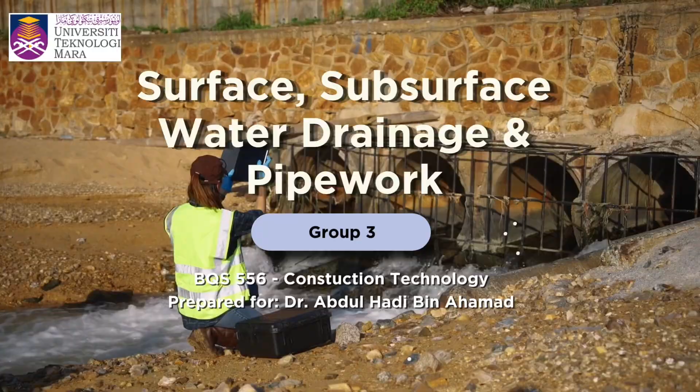Today, me and my group will present our case study related to surface, subsurface water drainage and pipework. These are our group members. We have Arfan Hakimi, Muhammad Shahid, Nur Akila and Siti Sarah.

Assalamualaikum, good day everyone. Today we are exploring a critical work of modern building drainage systems. Our presentation title is Surface, Subsurface Water Drainage and Pipeworks. It provides a comparative analysis of how we manage water at the surface and subsurface level, and the complex pipework system that ties it all together.

To illustrate this concept in the real world, we will be examining two projects of vastly different scale. First is the Mezzo, the Light City in Penang, and the Shanghai Tower in China. While the physics of water remain the same, we will see how the scale of building completely dictates the engineering response.

To understand why we need advanced drainage, first we have to look at the urban water challenge. The rapid urbanization has replaced our natural absorbent landscape with impermeable footprints like concrete and asphalt. This drastically alters how water flows, creating several threats such as urban flooding, water ponding and soil erosion. Perhaps most dangerously for a building, it creates hydrostatic pressure against foundations, which can lead to instability or leaks.

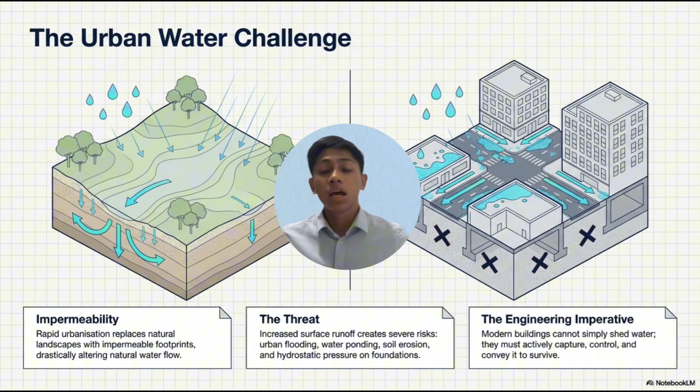In the modern era, the engineering imperative has shifted. Buildings can no longer simply shed water, they actively capture, control and convey it to ensure the structure's survival. A complete building drainage system is composed of three primary components. First is surface water drainage. This is our first line of defense. It captures rainwater from roofs, pavements and external areas using gutters and downpipes to prevent structural erosion.

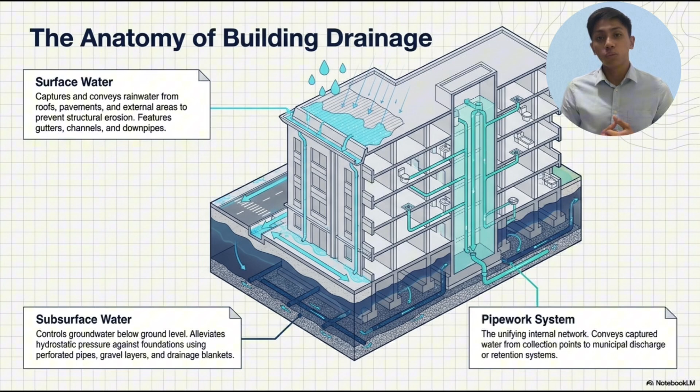Second is subsurface water drainage. This happens below ground and its job is to control groundwater and alleviate hydrostatic pressure against foundations using specialized tools like perforated pipes and drainage blankets. Third is the pipework system. Think of this as the building's circulatory system. It is the internal network constructed from materials like PVC, HDPE or cast iron that conveys captured water from various collection points to municipal discharge or retention systems.

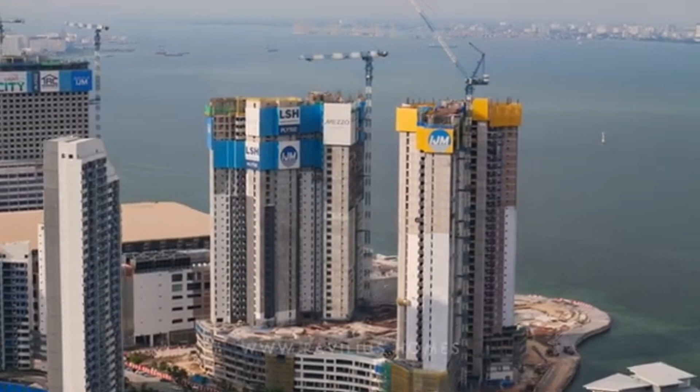To see this system in action, we are comparing two distinct engineering realities. On one side, we have Mezzo, the Light City in Penang, a 34-story residential development that prioritizes practical efficiency and gravity disposal. It represents the standard of high-density residential living on reclaimed land.

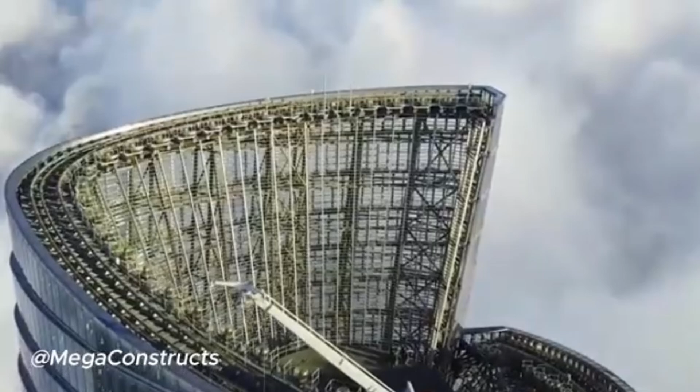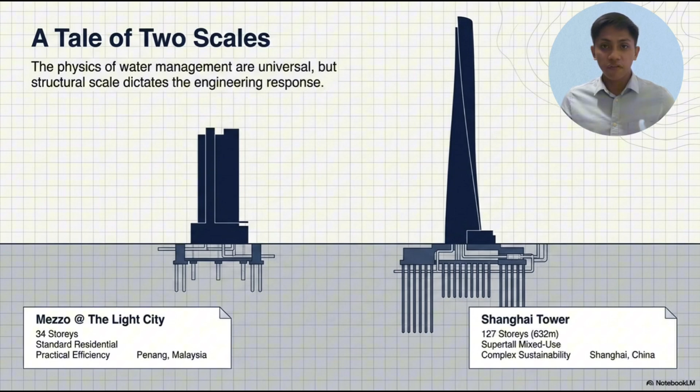On the other side of the spectrum is the Shanghai Tower, a 127-story super-tall skyscraper at 632 meters. The engineering challenges are exponentially greater. Here, water management isn't just disposal, it's a complex sustainability system featuring siphonic drainage and massive resource recovery systems that treat water as a vital asset rather than a hazard to be removed.

For our first case study, we selected Mezzo or the Light City, which is a 34-story residential development located at Jelutong Reclamation Land, Penang. The project consists of 456 apartment units built on top of a 6-story podium. One of the main reasons we chose this project is because of its location. Since it is constructed on reclaimed coastal land, the engineering conditions are quite different from normal development.

As shown in the image, the building is located very close to the waterfront. This means the site experiences a relatively high groundwater level, which increases the risk of groundwater fluctuations and differential settlement. Because of this site condition, the drainage and pipework system become much more than just a system to remove water. They are also essential for protecting the building foundations, maintaining soil stability, and preventing moisture from accumulating around the structure. Therefore, an efficient drainage system is a critical element in ensuring the long-term safety and durability of this development.

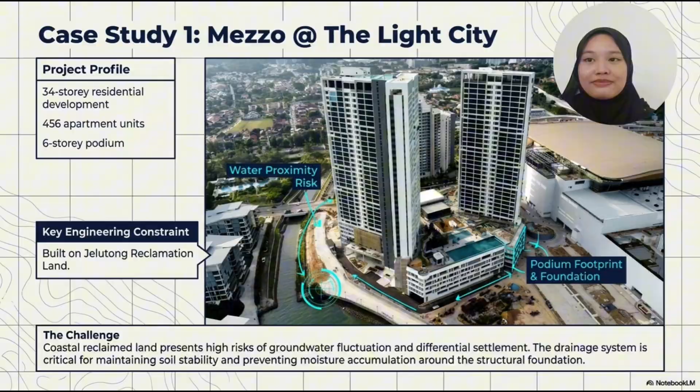Based on our case study, the project adopts a gravity-fed drainage system. Instead of depending heavily on pumps, the drainage network uses the natural slope of the pipes to carry stormwater and wastewater toward the discharge point. This makes the system more energy efficient and easier to maintain.

For the construction methods, the project uses the conventional open cut trench method. The construction process starts with trench excavation, followed by pipe bedding preparation, installation and jointing of the pipes before the trench is backfilled and compacted. This method is widely used because it is practical, economical and suitable for underground drainage installation.

Looking at the outcome, this drainage network is designed for rapid disposal rather than water storage. In a high-density residential development like Mezzo, the priority is to remove stormwater and wastewater as quickly and safely as possible. Overall, the gravity-fed system provides a reliable, low-maintenance and cost-effective solution that supports the operational needs of the large residential development while reducing long-term maintenance requirements.

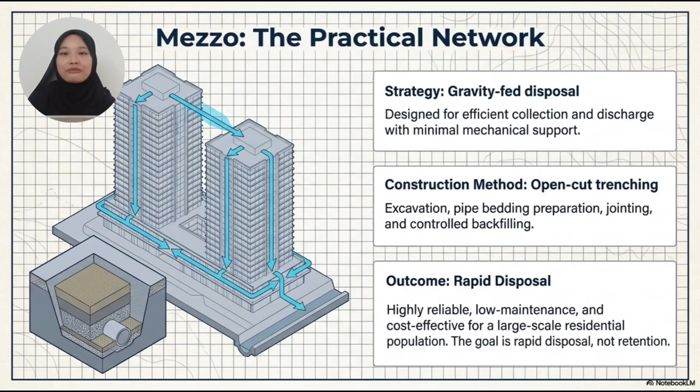For our second case study, we focus on Shanghai Tower located in Shanghai, China. It is a 632-meter super tall skyscraper with 127 floors and it functions as a mixed-use building including office, retail and hotel spaces. The key engineering constraint is its extreme height.

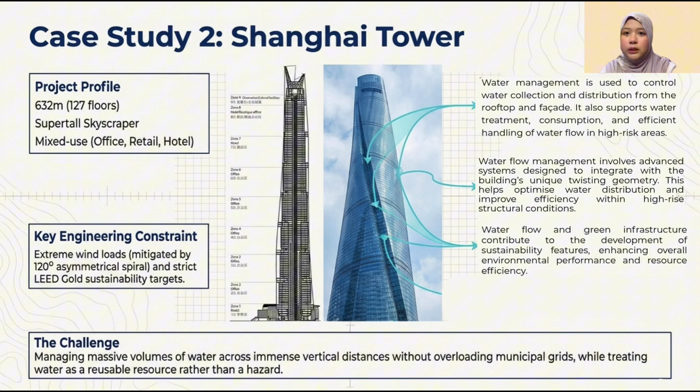Because of this, the building must deal with strong wind loads which are reduced through its 120-degree asymmetrical spiral design. Shanghai Tower also follows strict sustainability targets including LEED Gold certification. The main challenge is managing large volumes of water across a very tall superstructure without overloading the municipal drainage system. Therefore, the tower treats water not only as a hazard but also a reusable resource.

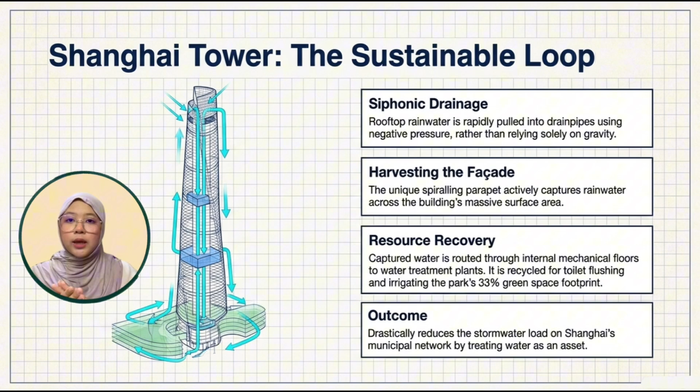Third, the captured water goes through an internal system and water treatment plant. After treatment, it can be reused for non-potable purposes such as toilet flushing and irrigation. Overall, the system reduces the stormwater load on Shanghai's municipal drainage network. It shows that water can be treated as an asset, not just as a waste.

For Shanghai Tower, the underground system is more complex. The building has a 5-story basement and a foundation depth of 31.4 meters. Because of the deep foundation and soft soil conditions, the tower needs strong groundwater control. The system uses dewatering pumps, sump pits, drainage layers, and pump-assisted discharge to reduce hydrostatic pressure and prevent water accumulation around the basement.

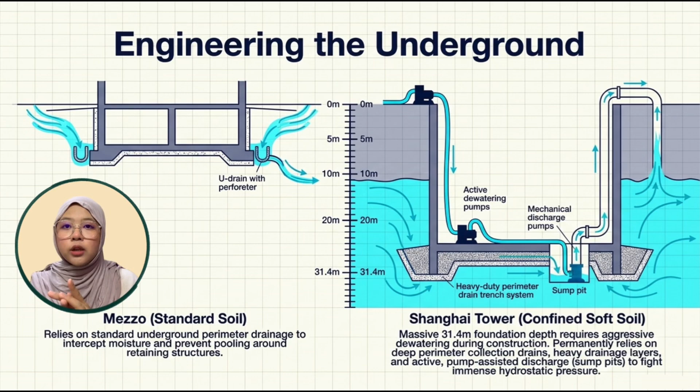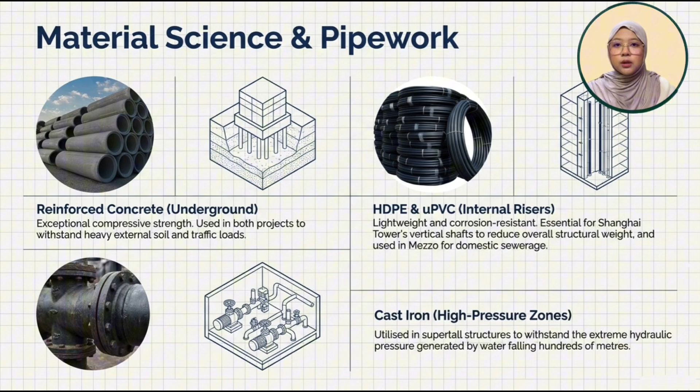Lastly, cast iron is more suitable for super tall buildings like Shanghai Tower, especially in selected drainage systems that need stronger pipework. Overall, the material selection depends on the building scale, function, pressure level, and long-term durability needs.

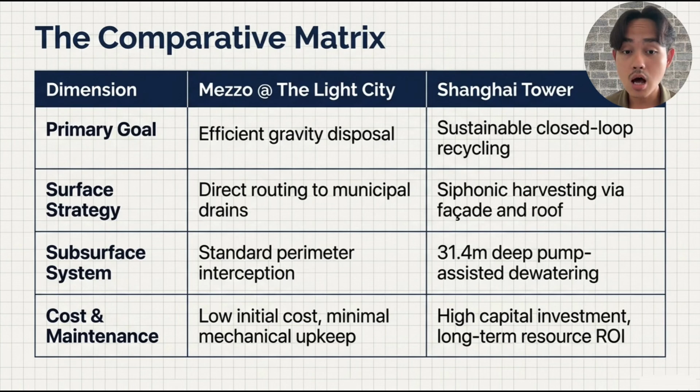This slide compares the drainage systems used in Mezzo at The Light City and Shanghai Tower. First, Mezzo focuses on a simple gravity drainage system that sends water directly through the municipal drains. It also has a lower construction cost and requires less maintenance. In contrast, Shanghai Tower uses a more advanced and sustainable system. For example, it collects rainwater through a siphonic roof drainage system and reuses it with a closed-loop recycling system. Although the initial cost is higher, it provides better long-term environmental benefits.

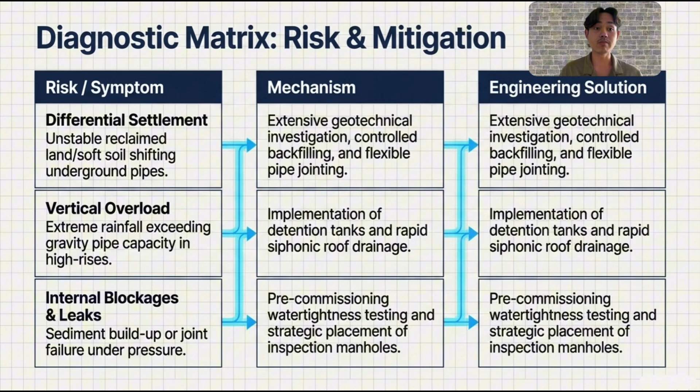After that, this slide shows some common drainage problems and their solutions. The first problem is ground movement, which can damage the underground pipes. We can solve this by using flexible pipe joints. The second problem is heavy rain, which may cause flooding, and this can be reduced by using detention tanks and a good roof drainage system. And the last one, pipe blockage and leakage, can be prevented by checking and testing the system before it is used.

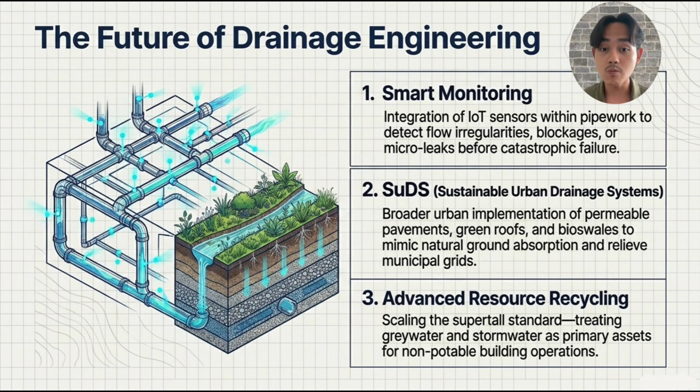Looking ahead, drainage systems are becoming smarter and more sustainable. First is smart monitoring, where sensors detect leaks or blockages early before they become serious problems. Second is SUDS, or Sustainable Urban Drainage Systems. This uses permeable pavement, green roofs and bioswales to reduce flooding and improve water management. And finally, advanced resource recycling allows greywater and stormwater to be treated and reused for non-potable purposes, helping to conserve clean water.

In conclusion, drainage systems have evolved from simply removing water to becoming an important part of sustainable building design. Traditional systems focus mainly on drainage, while modern systems also support water conservation, environmental protection, and long-term building performance. By combining efficient engineering with sustainable solutions, drainage systems can create safer, greener, and more resilient buildings.